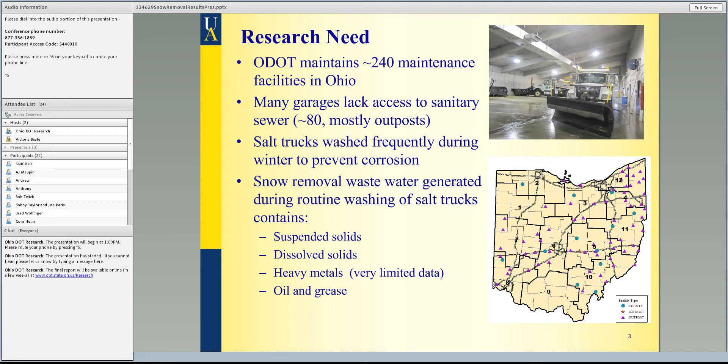Virginia Transportation Research looked at discharging the wash water directly to surface water with a permit. Again, because it has a high salt content, they concluded that that would require desalinization, perhaps with reverse osmosis.

They looked at testing of that. It was ineffective, and getting rid of the salt was not the problem. The cost piece of that was the ineffective part.

INDOT, at some of their facilities, via Purdue University, did a study in 2004. They looked at some treatment after oil water separators settling, and they reused the brine. Their water quality piece of that was primarily focused on suspended solids. There was not any heavy metals testing conducted on that report, which is a large gap.

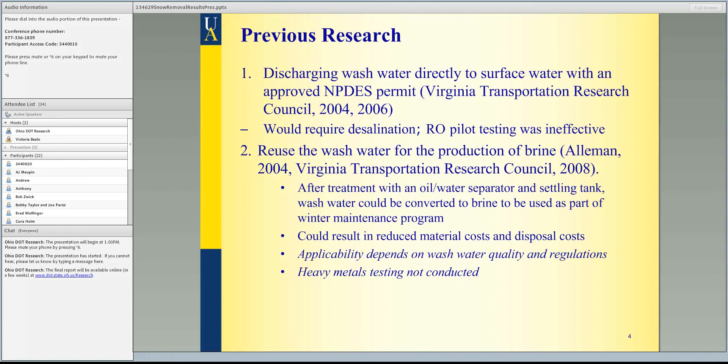So we looked specific to ODOT and based on that research need, based on what had been done previously. As we looked, in some cases the current disposal costs could be high. Particularly for commercial, collecting it and actually getting rid of it, this cost could be as high as 50 cents per gallon.

Then there were really three big, large unknowns. The volume of wash water that's actually generated at the nearly 240 facilities, or the 80 that don't have access to sanitary sewer. What's the quality of that wash water? We have an idea of what the constituents are in that water, but we have no idea at what levels, and whether they're of any concern.

And the real actual cost of managing that water had not been assessed. So we knew on an individual basis maybe we're paying 50 cents a gallon, but if we start trying to look at this from a comprehensive standpoint and look at all of the factors, what really are the costs associated with that? Given all that, we need to try and see if there's a more cost-effective way, or what are those potential wash water management strategies that could be employed.

So with that, there was quite a bit of information about roadway contamination. If you look at the side of the road, sediments, etc. But there was nothing, and I do mean nothing, about heavy metal concentrations or the wash water quality.

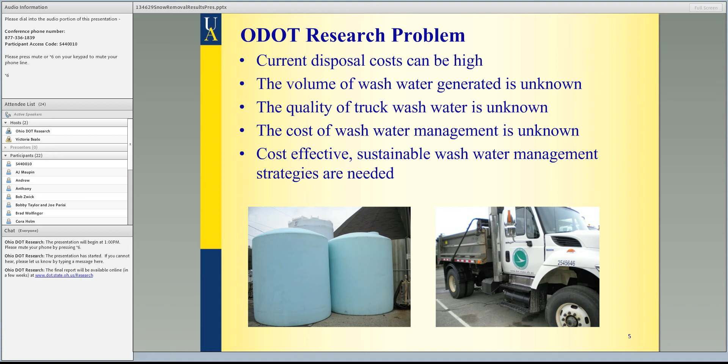So our first project objective was to actually begin looking at what other states were doing for handling that wash water, and make sure that we didn't miss anything. Next, we wanted to make sure that we looked at what the current practices were across the state of Ohio. And then finally, we wanted to look at what were commercially viable solutions for managing that wastewater.

So we weren't going to do a fundamental research project. We actually wanted to make sure that it was something that could be purchased off the shelf, manufactured, because if we have this large number of facilities, we want to make sure that it's something that can be implemented in a timely fashion. So for the project tasks, it ended up being two different phases.

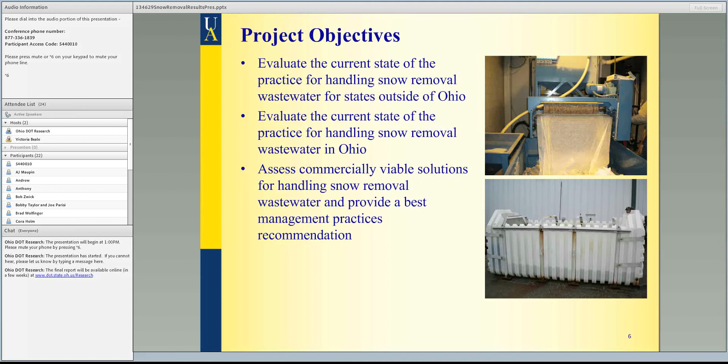As I mentioned early on, we set out on this project with the first 7 tasks that were phase 1, and I'll talk about those first. Those were, again, to look at the practices outside of Ohio, inside of Ohio, and the management alternatives, and do some cost analysis of different strategies.

At different times we met with the ODOT technical team, and then we wanted to develop and look at a cost analysis tool for the different viable strategies. So we did that. We also did some preliminary sampling of the wash water quality, and put together an interim report, or what we thought may be a final report.

At the time of the review of that report, it was decided that - and we'll see based on the results of this phase 1 - it was decided that we needed to get more wash water quality data and do a few other tasks. So phase 2 was implemented with 4 real distinct tasks from the first phase.

First one is that we needed to update the cost analysis tool. So what that really meant is that for the different strategies, the different factors, whether it's labor or disposal costs, we were going to upgrade that to make it more user-friendly and more applicable to doing the analysis that it would need to do.

Next was that we were going to look at 22 additional locations throughout the state. So we had 3 locations, but there was real concern whether or not those 3 locations would give representative results of the rest of the state.

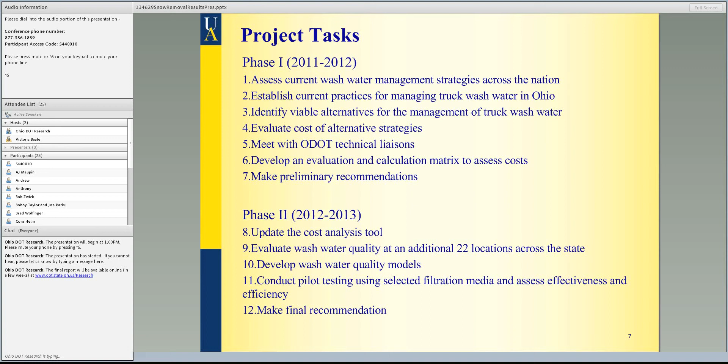The graphic on the right is a visual I'll expand on later. We found about 18 different versions of management strategies, and for sake of time today I'm not going to go through all of those—we'll focus on the 6 we eventually narrowed down to. Inside of Ohio, this number can change and be updated, but there are around 80 facilities that don't have sanitary sewer, using different strategies of reuse.

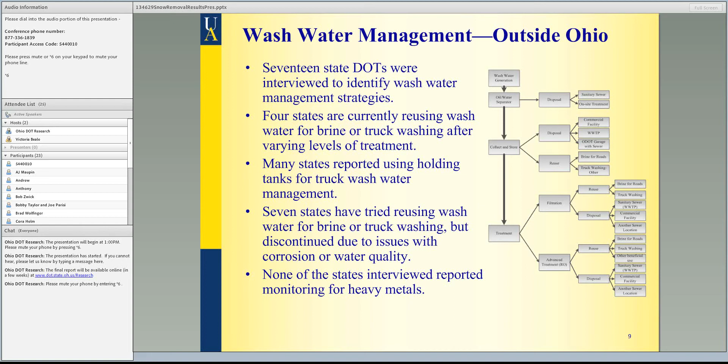Looking at Henry and Meigs County: in Henry County we have a pond, and they've been able to use that water, doing quarterly monitoring of the water quality. Some challenges have been that Mother Nature fills up the pond, and you have to dispose of and pay for water from Mother Nature.

In Meigs County, they've been effectively using a recycle treatment system, a clay-based system, to try and take some of the heavy metals out. The cost for these things—commercial disposal, if you collect it and then dispose of it—can be as high as about 54 cents a gallon. The lower end, about 5 cents a gallon, is if you're able to dispose of it at a wastewater treatment facility. Different factors go into that cost.

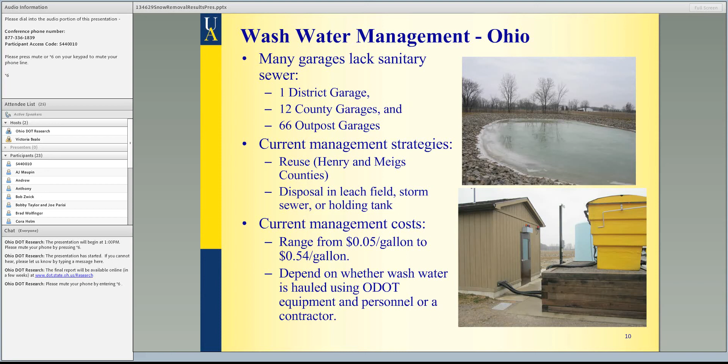When we looked at viable management strategies, about 18 different ones were identified. We break it down at a first level as a no-treatment view versus a treatment view. The no-treatment view further breaks down into on-site disposal or off-site disposal. If on-site disposal, the first option, one of the 6 identified as viable, is what's typically done: tying into the sanitary sewer. This becomes our benchmark baseline case against which we compare the other 5 management strategies. This was really where, in the early days of the research project, we tried to see if the assumption that tying into the sanitary sewer is the safest, most cost effective option—so it became the baseline option we looked at.

As far as off-site disposal without any treatment of the wash water, in all of these cases you're collecting it, but you could collect it, store it, and have a commercial operator come take the water away. That was option 2. Now, when I say these are viable, it doesn't necessarily mean they're cost effective.

These options could be implemented at many facilities and could be done tomorrow, so to speak.

The third option is to actually take the water and haul it to a wastewater treatment plant using the equipment and personnel that ODOT has. The fourth option was to do disposal at a nearby ODOT maintenance facility using ODOT equipment and personnel. Obviously, that facility would have access to sanitary sewer, but that may have other issues, like getting approval from whoever the receiving facility is for that water.

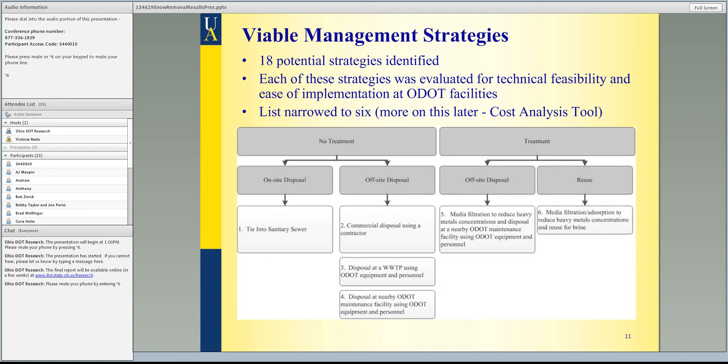Looking just at the non-sewer access facilities, this graphic organizes them by district. The blue bar is the estimated annual volume of wash water generated by those locations. We're trying to see the potential supply of wash water, based on survey records for time of wash and wash rate, validated with some water use records, which came out to about 3.8 million gallons.

The red bar is the annual five-year average of brine use by those associated non-sewer facilities, which averaged out to about 6.5 million gallons. So from at least a volume standpoint, the demand for that water, the potential use of it, does exceed the supply. It makes sense, at least for those non-sewer facilities, that you would have a means to potentially reuse all of that water.

Looking at our sampling effort, this was broken down over two winter seasons. In the first, we only looked at three sample locations. In winter 2012-2013, we had 24 garages, and we purposely chose one garage in each district.

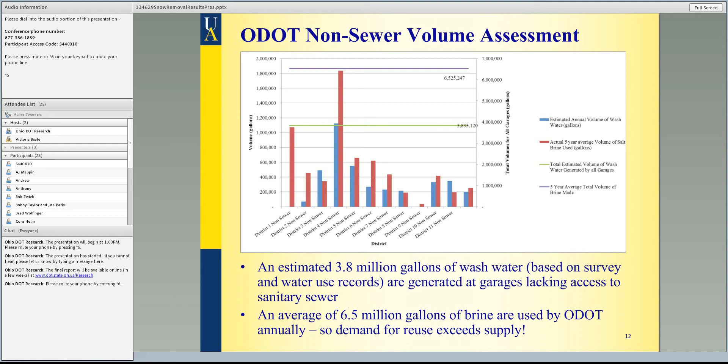Then we had three districts with a concentrated effort of roughly five or so facilities. If you're looking at 240 facilities total, or 80 that don't have sewer access, there was a balancing act of cost versus the amount of data that would be collected. I purposely put up here that this was over 10,000 individual sample measurements. I'll talk about the detailed things that were measured, like conductivity or total suspended solids, but this was a monster analytical and collaborative effort to get these samples.

During winter 2012-2013, at those 24 garages, the goal was to try and capture at least four wash events. By wash events, we mean after the trucks have been out and things have cleared, bringing them in - whether it's 10 trucks or 12 trucks - and washing them. That was a wash event, and I'll talk about more of those details in a second.

So, 24 locations, roughly four different wash events. Whether they occurred in December, January, February, or whenever, we didn't specify separating them because we didn't want to impede any winter operations - and we can't control Mother Nature. That was the limitation we had: four winter washing events. The sampling protocol for one of those events - the details aren't completely necessary here - but during a wash event, we would sample at the beginning, middle, and end of that event.

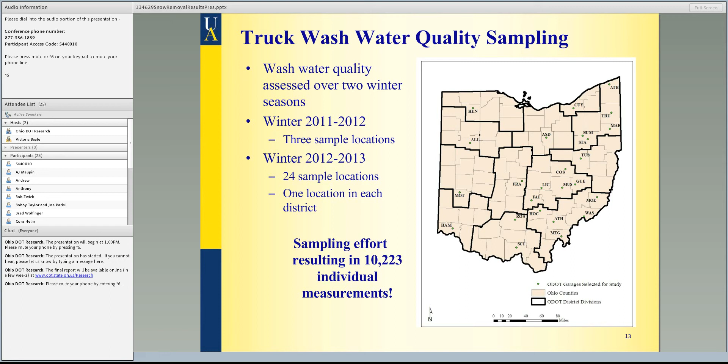If they're washing 10 trucks and you wash each for around 30 to 40 minutes, that could be a full day of work just washing trucks. The beginning, middle, and end of that would be at the start while they wash them, somewhere in the middle, and then towards the end, since different facilities had a different number of trucks. We did not have a hard and fast standard method here, other than the guidance of let's get the water as it first comes out of the oil water separator, get it during the middle of the event, and get it towards the end of the event. From each of those samples, we tested for 17 different heavy metals and 10 non-metal parameters.

In the final report we have enough tables to look at. Of those 17 heavy metals, we pick up traffic metals, and we'd also have any of the non-expected traffic metals. As far as the non-metal parameters, we primarily had oil and grease, dissolved solids, suspended solids, and conductivity. These are of primary interest for potential disposal or reuse regulations.

Before I get into the specific numbers and parameters, I wanted to give you an idea, just visually, when we started looking at those water quality results and wanted to compare them against reuse and disposal guidelines, how would things pan out? Now, I don't want to show you a table with all the different disposal and reuse guidelines here.

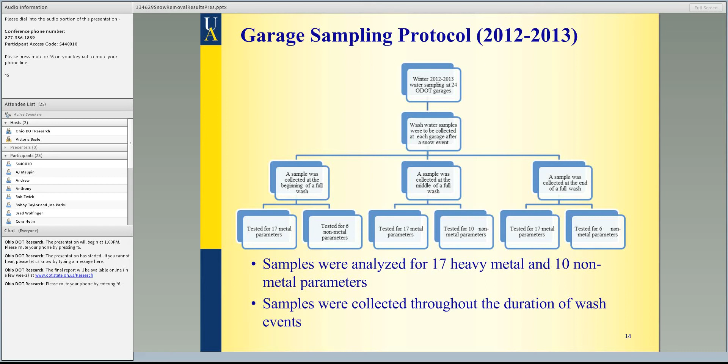The key thing is that these aren't hard and fast regulations. Depending on the wastewater treatment plant or receiving facility, they may specify a certain concentration of copper, and a different location may specify a different concentration. But we used actual values for these - we used Ashtabula. We looked at some others for disposal guidelines that we compared the heavy metal concentrations and total suspended solids and oil and grease against. And then we used different aquatic environmental levels for reuse guidelines.

When you look at this, starting at the 10,000 foot view, the parameters of concern - meaning they potentially exceeded these disposal or reuse guidelines - the following jumped out: copper, zinc, and iron. Believe it or not, there is actually an iron guideline, and lead on the metal side. Then on the non-metal side, oil and grease, and total suspended solids.

Looking at the graphic, there was only one garage where, regardless of the samples, all the samples were below those guidelines. But in general, we had a decent number of hits that were above disposal or reuse limits. I'll start breaking that down for you on the next slide for these specific constituents.

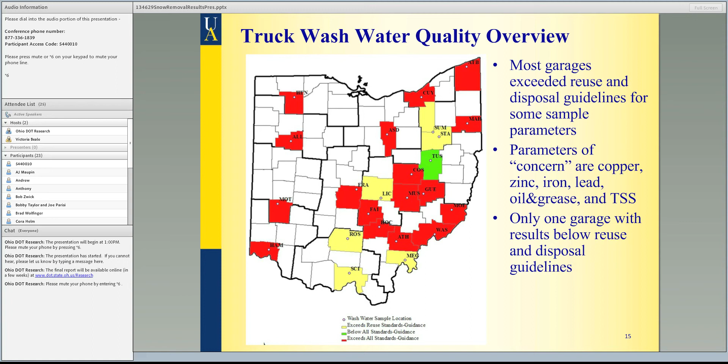If we looked at it, there'd be 4 events potentially at a garage, with 3 samples during an event, so you could have 12 different samples at a garage. So if we looked at the median concentration of those 12 samples across our 24 garages, how many of them, on these different constituents, were exceeding the local disposal guidance or reuse limits? This first set of columns has the garage medians. If you look at disposal first, very few of the metal samples exceeded - 4% of copper, 13% of the garages on zinc. We had a much higher hit on total suspended solids - 67% exceeded the disposal guidance.

Converting that over to looking at the percentage of garages exceeding the reuse limit - the reuse limits, the aquatic life standards, are much more stringent than the disposal standards, so you're going to have a higher percentage. On copper and zinc, that number was above 70%. And for oil and grease, we actually had a hit of around 80%.

So that's just looking at the median concentration. If you look at all the samples on an individual basis, not worrying about the garage, we just look at all 253 samples with the 17 heavy metals and 10 non-metals, and look at the percentage of samples - you see the numbers are comparable to what you saw when you just looked at the median. Again, on disposal, TSS was the problem, or parameter of concern. From a reuse standpoint, copper and zinc were again around 60-66% of samples above the reuse standard, and oil and grease around 74%.

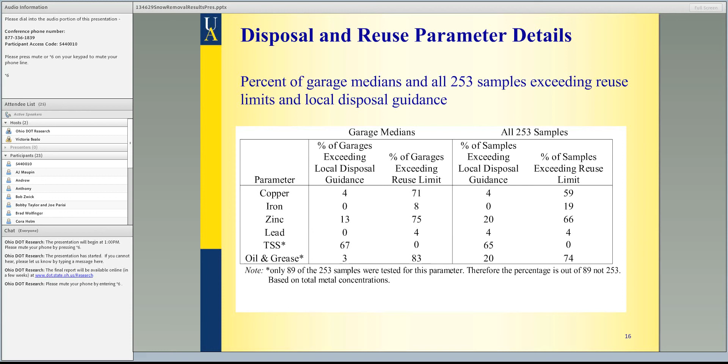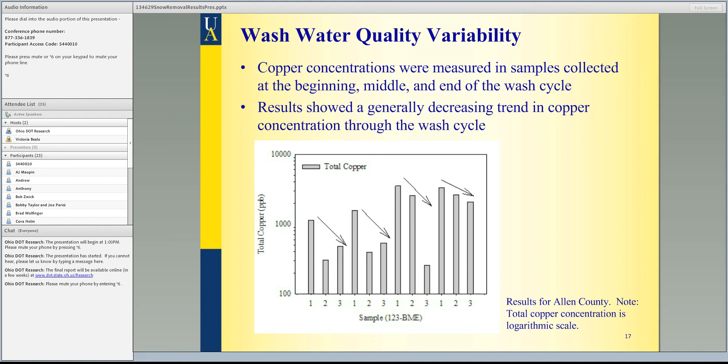Summarizing some of these results, and we'll revisit them when we look at some pilot results and the ability to reduce these concentrations, we did compare them to these reuse and disposal standards. There really was a small number of samples that exceeded disposal guidelines. There was some TSS on the disposal side, but I think that's a simple fix, or it points to my last bullet here, which is the performance of the oil water separators.

If you have high suspended solids, that just may mean we're not quite getting the settling and removal that we would normally expect or should expect. In a collect and store situation, that wouldn't be a problem, because the suspended solids are going to settle. So from a disposal standpoint, very few samples are really of concern.

Looking at some specifics about the metals that we did see, we started to notice a difference between the particulate and dissolved ratio. A significant fraction of these metals were in particulate form. The literature on what you find on the side of a roadway supported this, knowing that it's coming from brake dust, corrosion of different vehicles, exhaust, etc. I'll talk about that a little more in a second when we looked at actually removing the metals from the water.

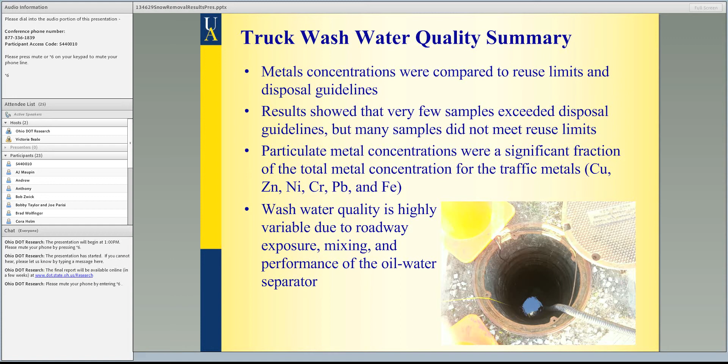On the modeling side, we wanted to try and identify factors that we thought were telling us what's controlling or contributing to the levels that we were seeing. This first modeling effort was looking at binary logistic regression models, binary meaning just yes or no: is the sample above or below a reuse standard.

I'll kind of cut to the chase later. The purpose of this was to begin trying to see if we could monitor for something at the garages that would tell us whether or not there's a higher likelihood that that wash water is going to exceed a potential reuse limit. So if we could monitor turbidity, which is cheap analytical equipment, or use a probe for conductivity, something you could just take a quick sample of.

That was the idea behind this modeling, and we found that TDS, total dissolved solids, and turbidity were good surrogates indicative of the oil water separator performance and/or truck cleanliness. When I say truck cleanliness, I'm not implying that the ODOT trucks aren't clean. It's just that depending on the degree with which they've been washed or exposed to roadway particulate matter, these surrogates, if they were higher in general, would let you know there's a much higher likelihood that the copper or iron level would also be high in that wash water.

Actually, I'm going to back up. We're limited today to talk about what's in the research report. We do have several publications where we've begun converting this to much more of a rule-based approach, if the turbidity is above a certain level, etc., that we're preparing and should be put out for publication soon.

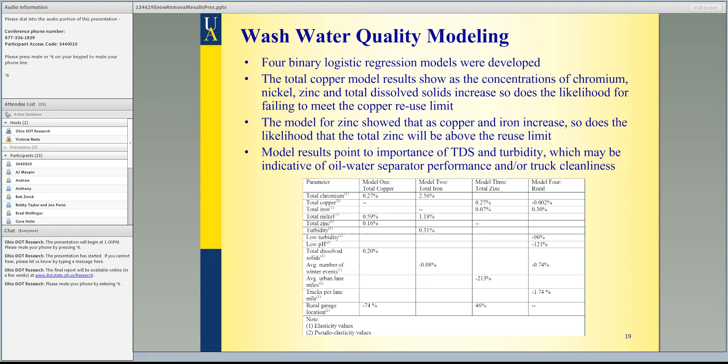Again, the reason we focused on copper and zinc was because they had the highest number of samples that exceeded the reuse guidelines. So they're the ones we want to focus on getting down to a certain level.

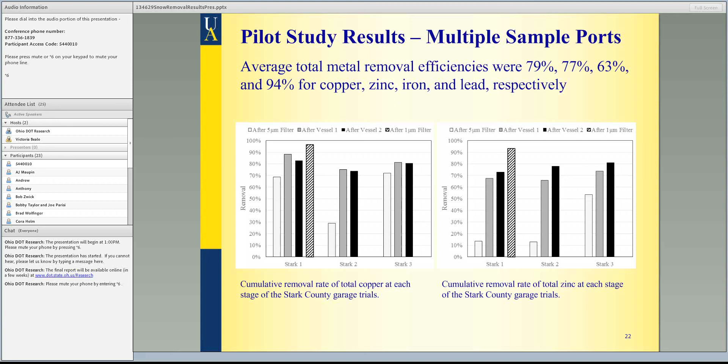So we said, well, if we have these 5 micron particles, let's do some basic calculations to see whether temperature, whether it's 40 degrees Fahrenheit, has a large effect. It has some, but not a large effect. What kind of settling time would it take to remove those? So if the wash water is taken from the oil water separator, put in a tank, and you left it there, how long before the 5 micron particles would settle out?

For 5 micron particles at 3 meters, for copper and zinc, it's anywhere from 11.7 to 15 hours before those would settle out. If you go to even smaller, 3 micron particles, those times go up, but we're not talking weeks here—about a day and a half to 2 days, and those particles would settle out.

So the question becomes: is the media actually doing anything, if the particulate fraction can be removed with settling? We looked at the additional removal beyond the 5 micron, and since it's going through a filtration media, we don't know completely whether the removal mechanism is filtration of particles less than 5 micron plus just adsorption of the dissolved phase of what's going through there.

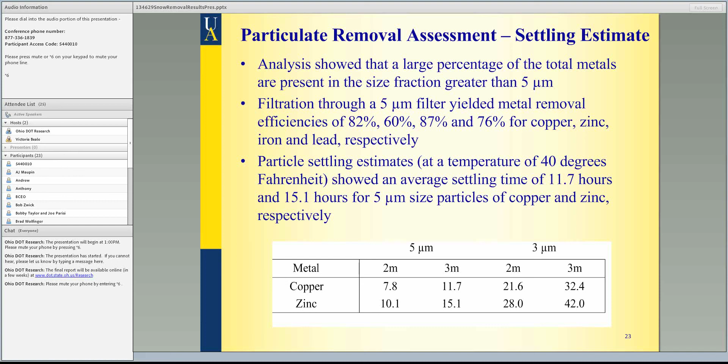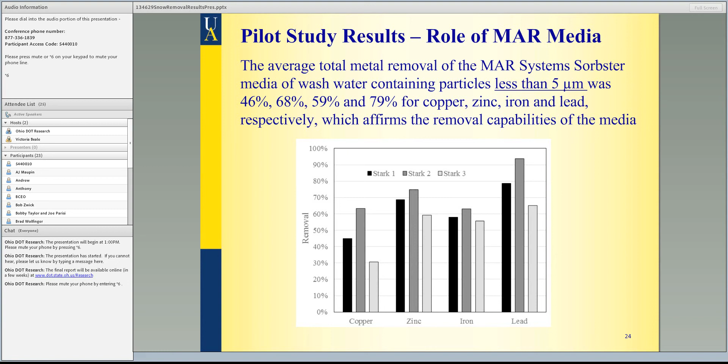The key here is to look at the big factors that were involved. For the sanitary sewer option, it was simply the tie-in cost, capital cost, permitting, etc.—a single value. For commercial disposal, hauling and disposal, we put in 30 cents a gallon. We had seen payments made as high as 54 cents a gallon, so we lowered that down to around 30.

These are the baseline numbers when we wanted to look at some different scenarios, which I'll talk about in the next couple slides. For all of the hauling and disposal, we took ODOT labor rates, normal equipment rates, fuel, etc. into account. The basis for looking at these was the equivalent uniform annual cost, so whether we assumed a life of 40 years for sanitary sewer or 70, all these things were eventually brought down to an annualized capital cost.

The filtration unit lifetime as well, whether it was assumed to be 10 or 12 years—all those things could be modified in that cost analysis.

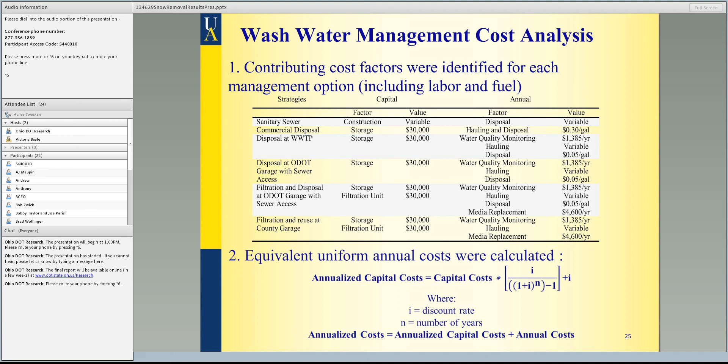So the furthest hauling distance for a high volume facility - relative to the sanitary sewer tie-in cost - we found that if sanitary sewer was $173,640 or less, it was the most cost effective, assuming those baseline conditions.

Once you get to about $285,000, all these other alternative strategies start to become more cost effective than tying into sanitary sewer. Without getting into the details of disposal versus reuse, the assumption here was strictly looking at costs, not whether it would be in compliance. It's assumed on the reuse strategy that it would be allowed to be reused.

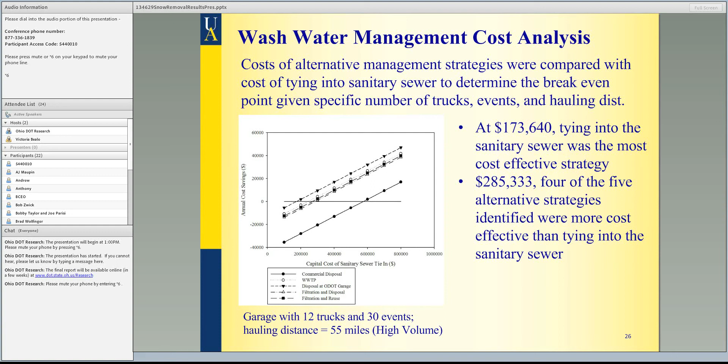We even have the analytical monitoring costs in there if a facility is going to take it to another location and dispose of it, and you have to sample quarterly or monthly. If you know what those costs are, all of that could be put in there.

The middle portion of the tool shows the annualized cost - on the far left is the sewer tie-in, and then the other 5 alternative strategies. You get to see quickly the one that's much higher - that's commercial disposal, which again we've seen time and time again. The actual values are in the last third of the spreadsheet for the annual costs and the potential annual savings.

Again, this was for a single garage, so if you want to look at the specifics - how it breaks down and modify the number of trucks, events, etc. - this is how this was set up. We did have another version of the tool that looked at things from a district-wide perspective with some optimization, but for the sake of time, we're not presenting that today.

Before talking about implementation and recommendations, any questions? Just to summarize again, we looked at best practices and came up with these 6 strategies we considered viable. I like to say that we - or ODOT - has the largest wash water quality database on planet Earth, and I'm now on record again saying that.

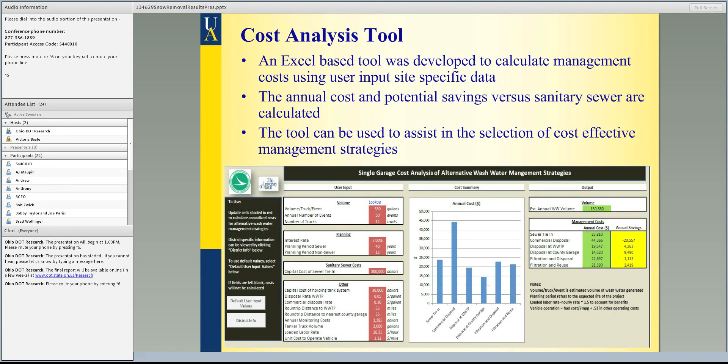We did some modeling to identify some things that perhaps could be used as surrogates for monitoring that wash water quality. We did some pilot testing.

We didn't anticipate that part of the wash water characterization would involve a particle size distribution analysis, since we were working within certain limitations. But once we started testing and found this 5-micron part, that allowed us to look at settling at least as a partial removal alternative, and we calculated that time to be anywhere from 12 to 15 hours.

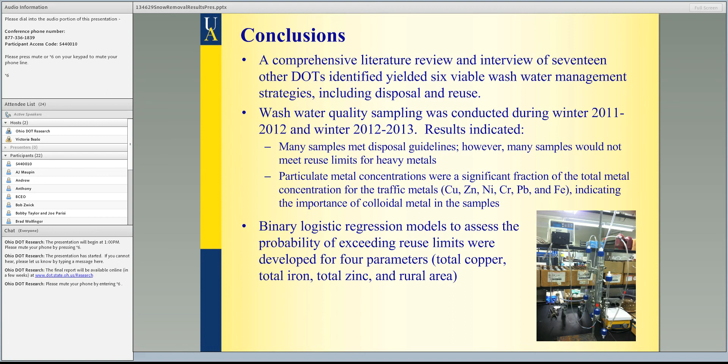We found the different factors and incorporated those into this cost analysis tool again, which, depending on the assumptions, runs anywhere around 95 to 170,000 before these other alternatives become a much better choice.

So looking at some recommendations for implementation, I've tried to organize this by time frame, so I think about the things that could be moved forward immediately versus some for further in the future.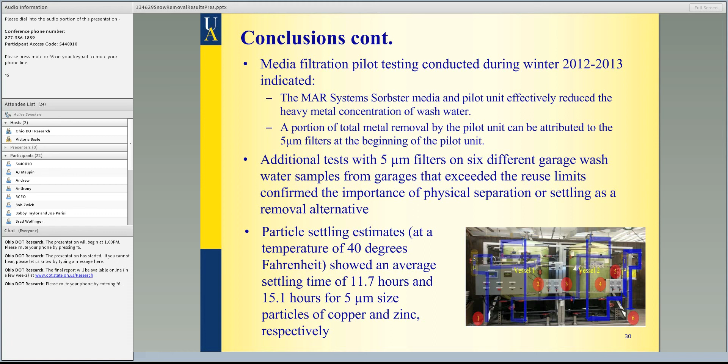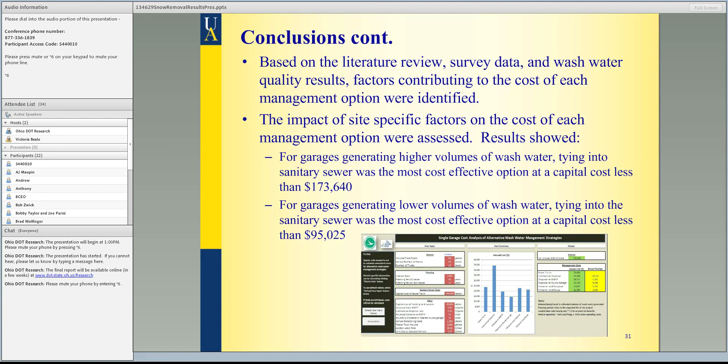Immediately, I think that for all the locations that collect and store, we should allow at least 24 hours for settling. We also ran into issues with transport from Stark County—even though we have the finest roads in the country, there's a little mixing that takes place, and so we had a particulate mess that exacerbated our particulate problem. You'd want to make sure that when you actually pull off the storage tank, you take steps to minimize particulates being mixed into that wash water.

No matter what, this is a good thing—those heavy metal particulates are going to settle to the bottom of the tank. Sure, you're going to have to manage those, but you're not going to be disposing of them at the wastewater treatment plant. The second item: for all the locations that pay for commercial disposal, if there are still any of those, investigate disposal requirements at a wastewater treatment plant.

Indeed, this is what happened with one of the outposts in District 4—we were able to take it and reduce that cost substantially. We think that this large database provides the justification for what that wash water quality may be.

Immediate cost savings is very likely, and eliminating commercial disposal is an option. The third bullet is to actually use this cost analysis tool to determine site-specific costs and assess and rank wash water management alternatives for all facilities without access to sanitary sewer.

Again, we could have done that—we had an inventory of the trucks, etc., at these facilities—but there's going to need to be some manager input, or even a high-level district look at these things and assumptions that, other than those basics, we weren't comfortable making. It would almost have to be looked at with an uncertainty analysis as well, assuming the number of winter events and those kinds of things.

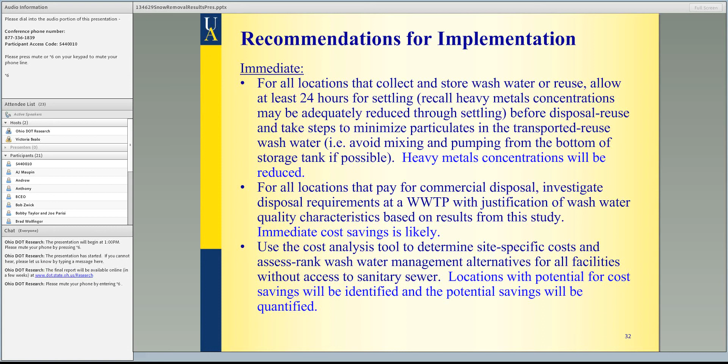As far as the second bullet, we should actually monitor the filtration unit's performance and operations. We have the 3 large batches from Stark, so it'd be good to get additional unit performance data during multiple wash events. The operations piece is important too—we didn't run into any operational problems, but we only ran the unit hardcore on about 4 batches. You'd want to begin looking at what happens after 15 or 20 uses, cleaning the media, those kinds of things.

The third bullet: for locations with potential high cost savings, we could actually begin creating a plan or strategy for moving forward with those. Depending on what's going on with those locations, we've created a schematic looking at where you can monitor some of these other surrogates.

Total dissolved solids via conductivity probe, turbidity, and iron were all excellent surrogates for seeing whether or not the wash water quality is good or bad from a reuse standpoint.

So no matter what, you're going to have to collect it, store it, and let it settle. The graphic shows, and again, the calculations, you can remove 50 to 80% of that water. If you take a sample and do the conductivity, turbidity, what we're doing right now is modeling and seeing that with 80%, 90% accuracy, we can flag whether or not that sample is going to be high or not.

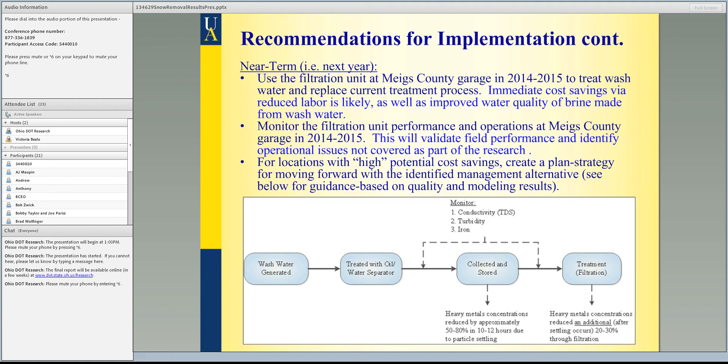And I think that coming up with these surrogate parameters, they're cheaper, easier to use, would be the path to suggesting, again, validated with at least information from Meigs County Garage, that that's a viable strategy for moving forward.